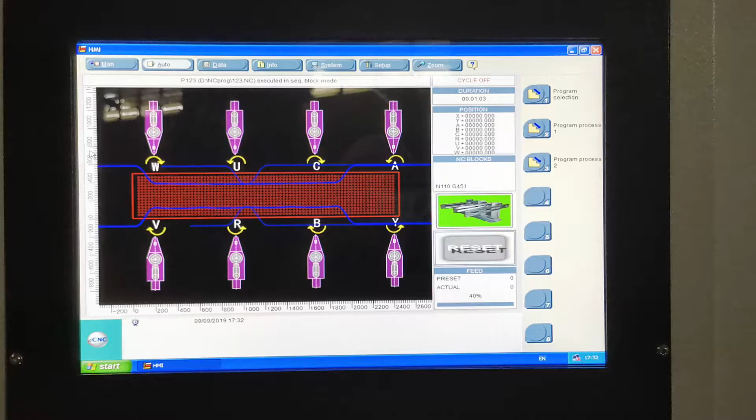Okay, now we will make an introduction for the controller.

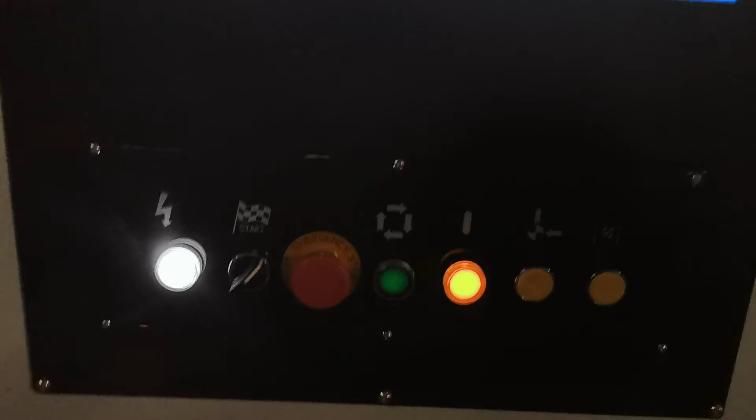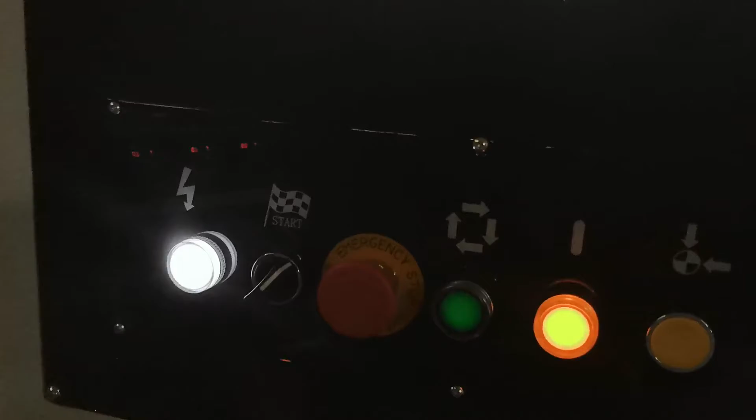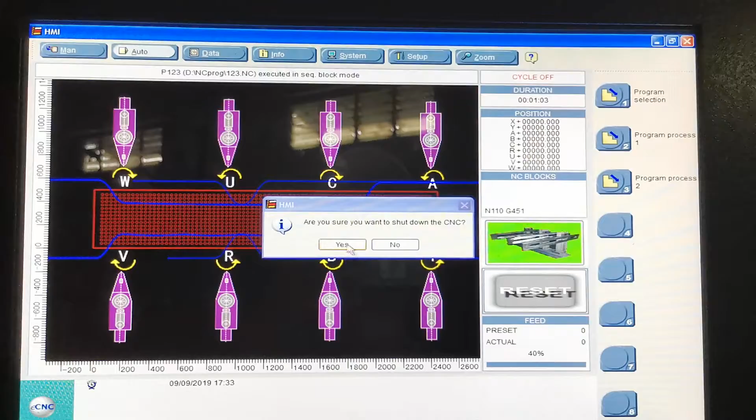Now we will show how to close the controller. Turning off the controller directly by the button is prohibited - the light isn't very good so we cannot see clearly, but this is not the correct way. For the correct turn off, we need to shut down the computer through the proper shutdown process. First, turn off the software by pressing this, then press this button and press shutdown to shut down the computer. After the monitor is black, we can turn off the power by this button.

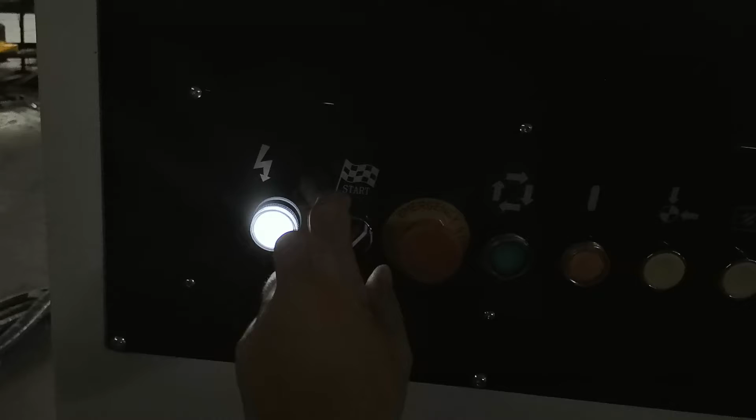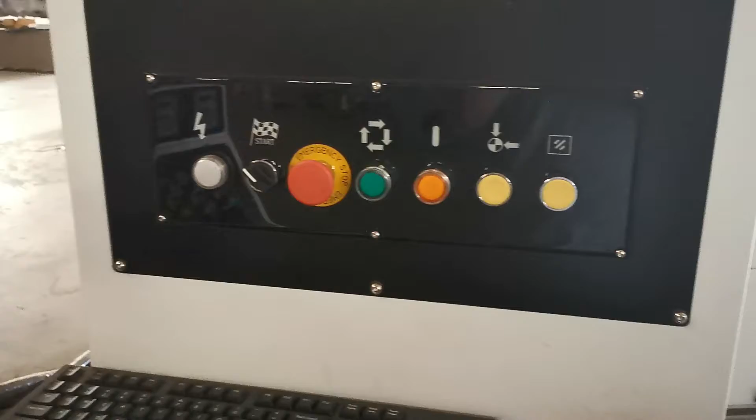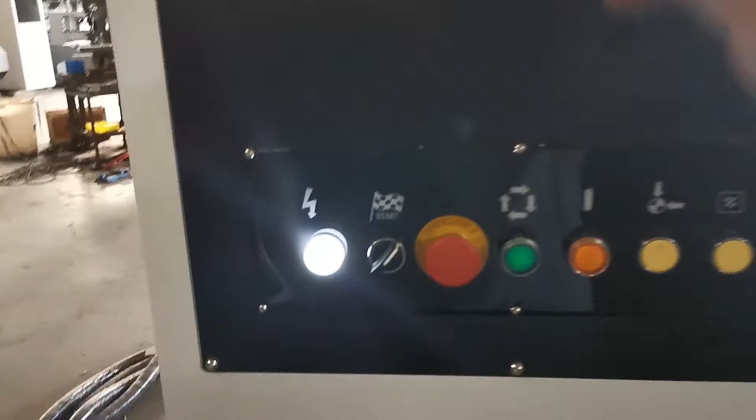Now we will start the controller. First, turn this button to turn on the power. Now the system will be starting.

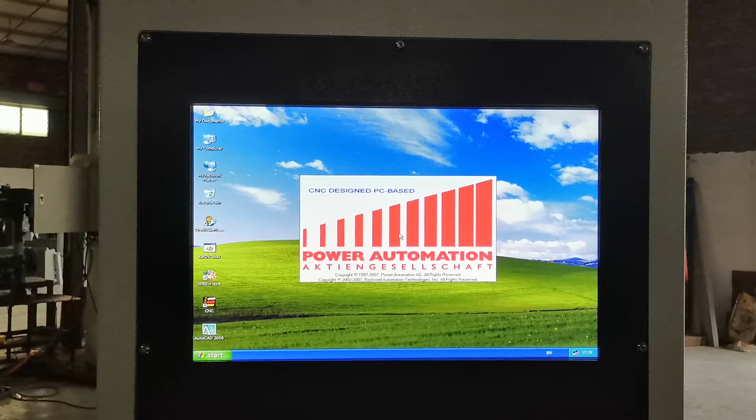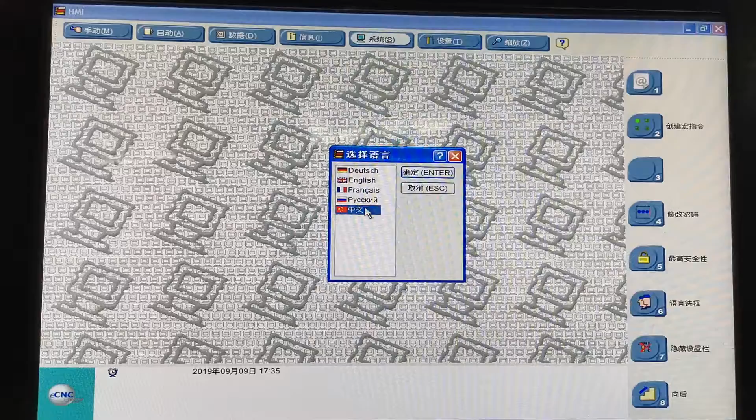Now the controller program is starting. We'll make an introduction. Here we can change into the English version. Now the interface is in English. This is the manual - you can press this button.

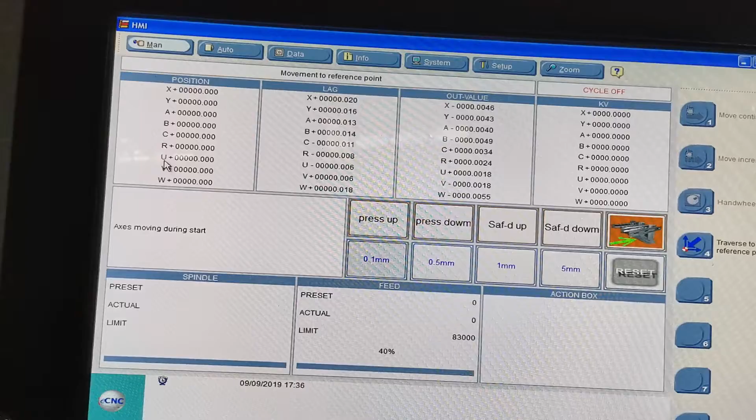Press up and press down control these press cylinders. This is the safety door, and this is the stop fans. We can demonstrate this.

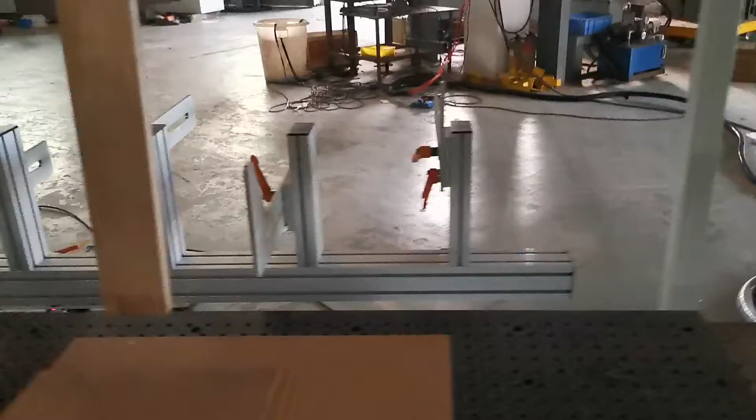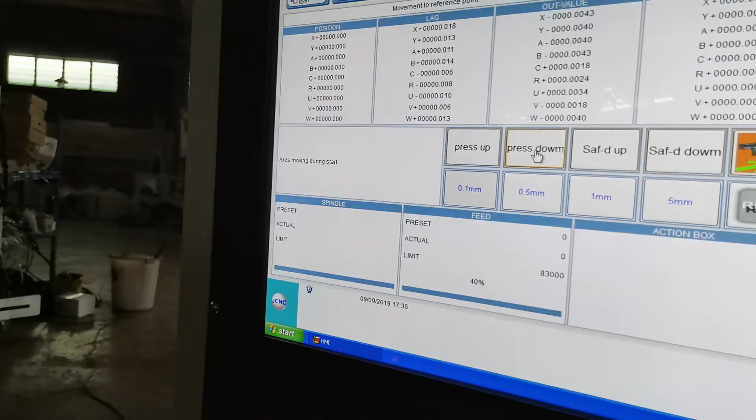Now the press cylinder is in the up position. We can let it press down - we press this button and now it will come down. Press up.

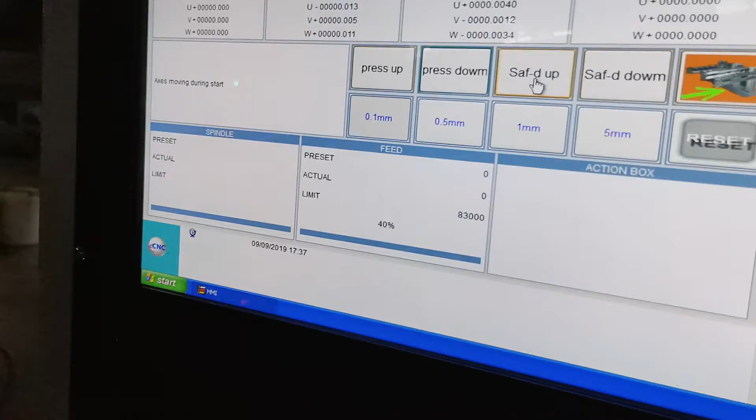Press down. Now we can press the safety door up. We can check here the safety door is up. We can press safety door down and it will come down. Safety door up, down.

We can check the stop fans by pressing the stop fans button.

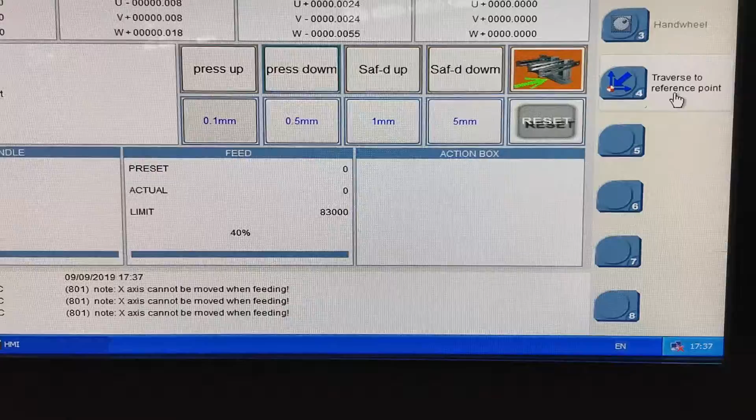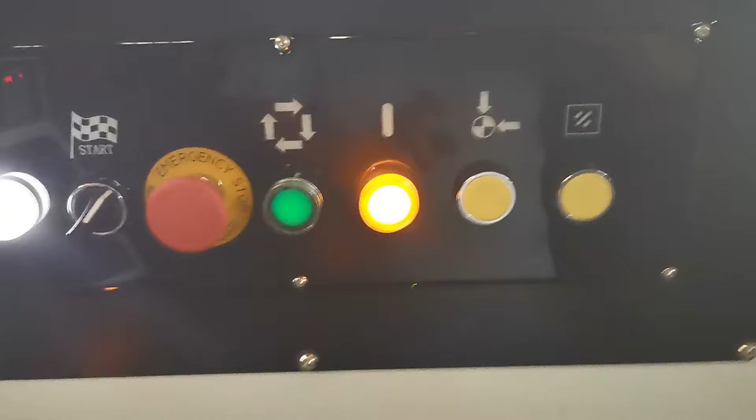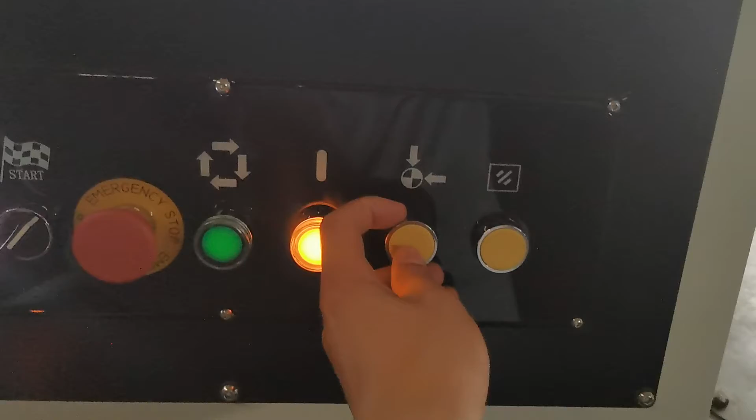This one is go back to the reference point. Normally we don't use this button for the machine to go back to the reference point - we use the other buttons. We can check the buttons. This is the go back to reference point button. Here we can check - it's already at 0. We can press this one to see what happens. We can see the head is going back to the reference point.

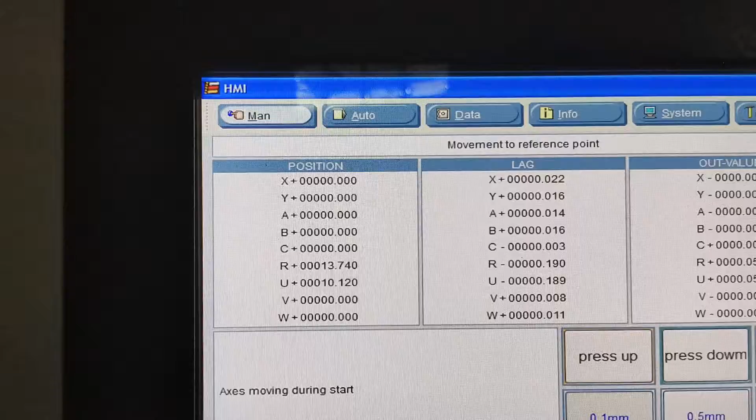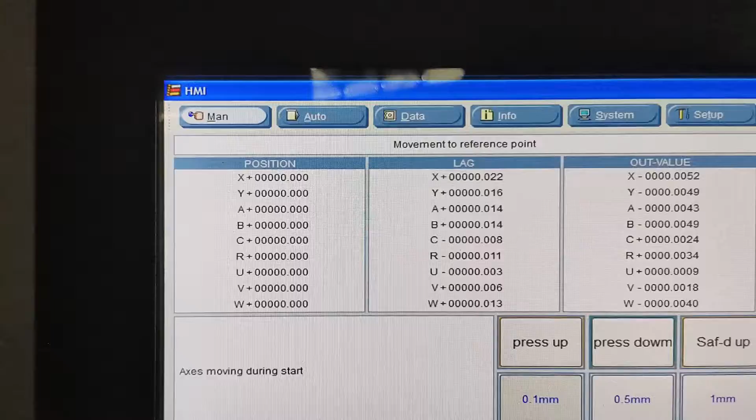Now the system has gone back to the reference point. Next we will show the auto version.

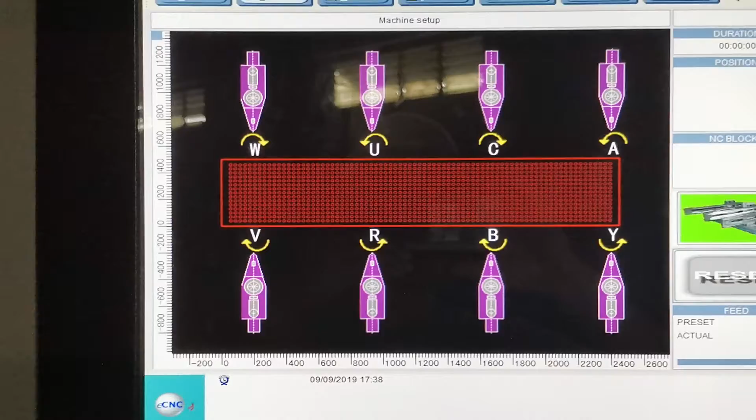Press this button. Here shows 8 heads, for the milling head and sanding belt. Here is a button - this one selects whether the stop fans work or not. If we make it green, it means the stop fans will work in auto version.

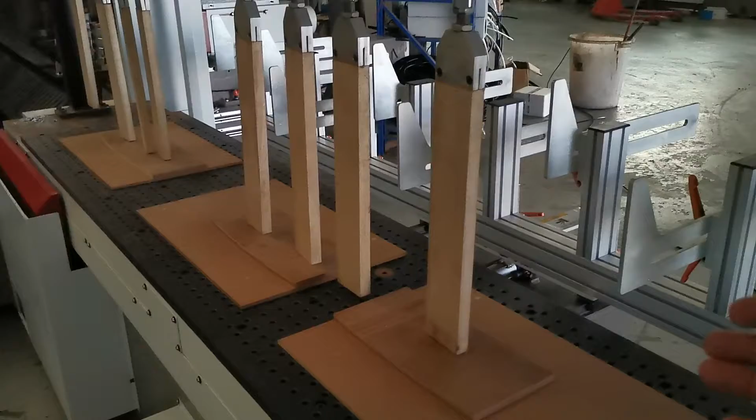After production for each cycle, the stop fences will move forward and stop, waiting for the new workpiece loading. After loading, we press the start button on the controller and it will do the next production cycle. The stop fences will move backward.

The stop fences will be moved forward and backward automatically.

This one is a program selection. For example, I want to produce a program - we will press this button and select our program.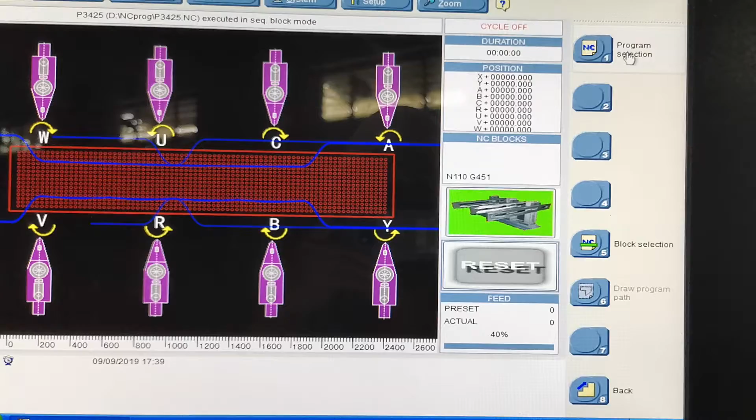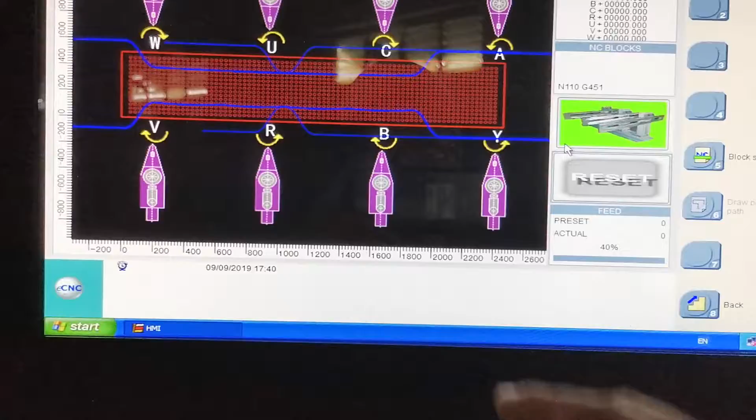Here it opens the file selection window. We press all files and it will show the NC programs here, in this files folder. We can, for example, select this one. Now the program has gone here and we can check the file name here. It's ready for production.

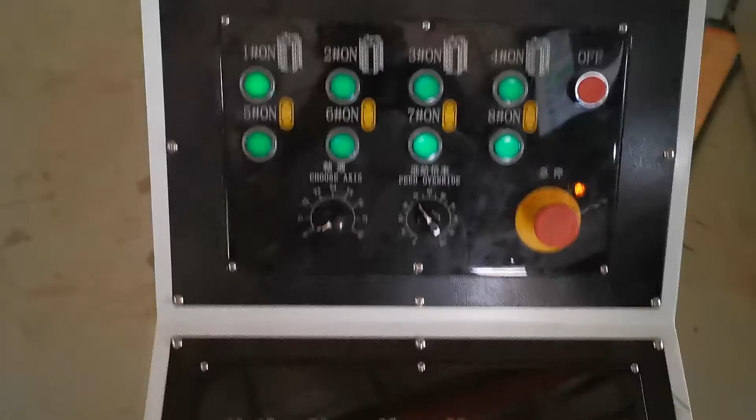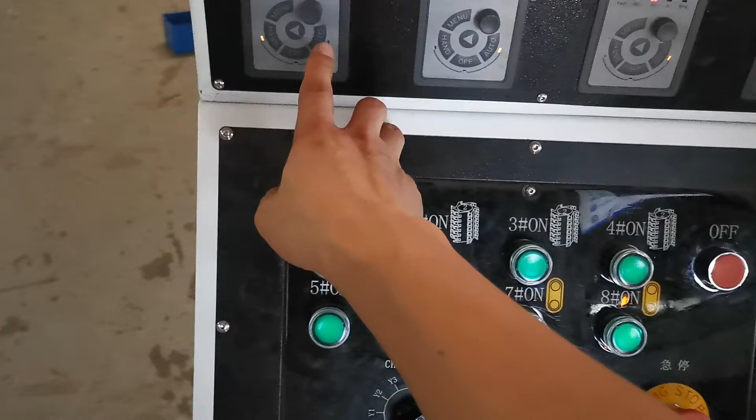Next, we can use the controller box to do the production. This button shining means it's in auto version. If we want to use the sanding belt, we need to make sure the auto run is lit. If it doesn't light - for example if the auto doesn't light - it means this sander belt doesn't work. Only when the auto light is on, after pressing auto and it lights, can this one work.

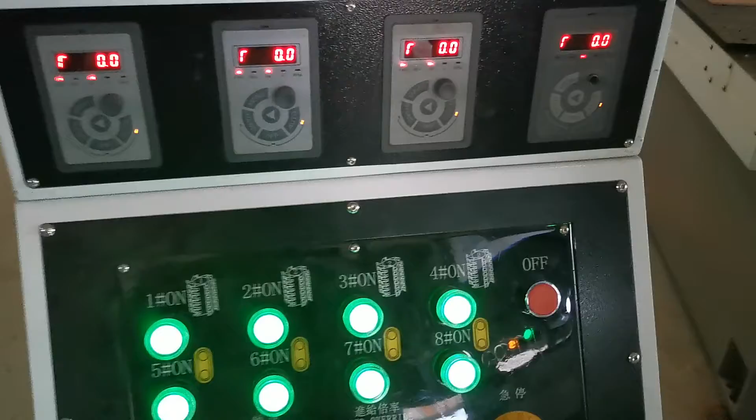For example, if I want to use all of the milling cutters and sanding belt, we will press all of them, making all of them light up. Then we can select the production speed, then press the button and it will work.

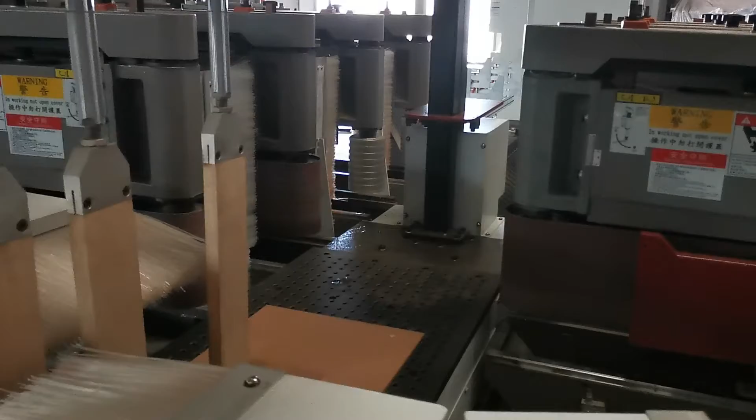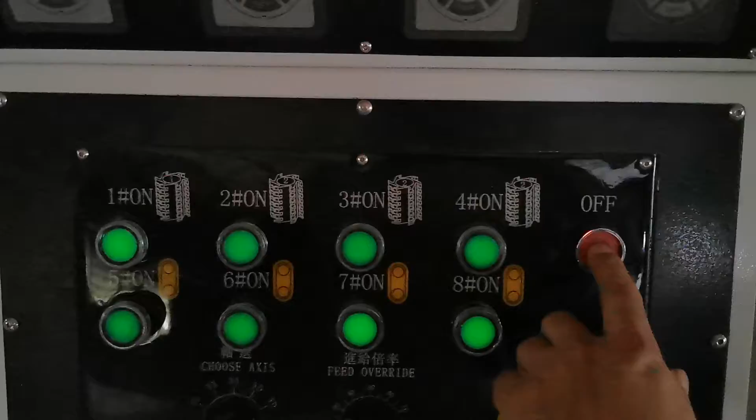We press this one to stop all of them. And another one...

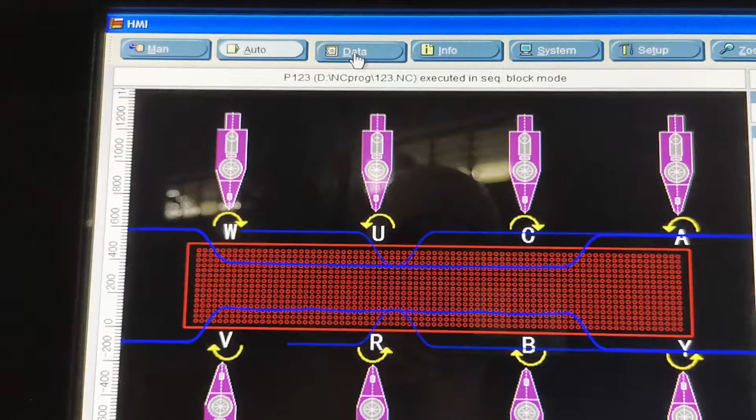This data shows the offset for the sanding belt and for the milling cutters. For the milling cutters, we don't need to input the offset - we don't need to change the data here, just keep it at 0.

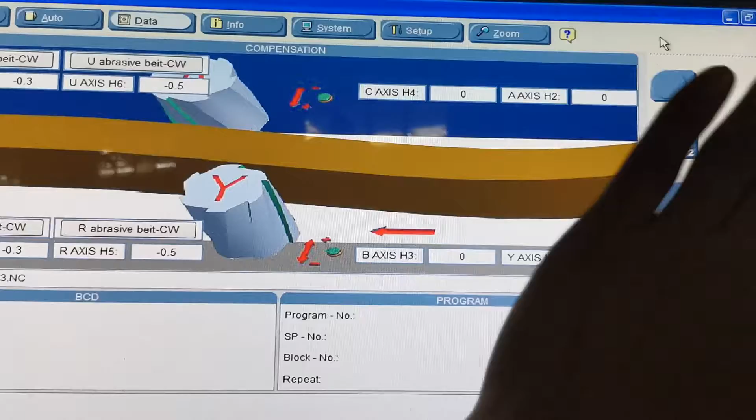For the sanding belt, we can change the offset data as per the request. We can check the sanding result for the workpiece - if you want to sand more, we increase the data; if you want to sand less, we decrease the data.

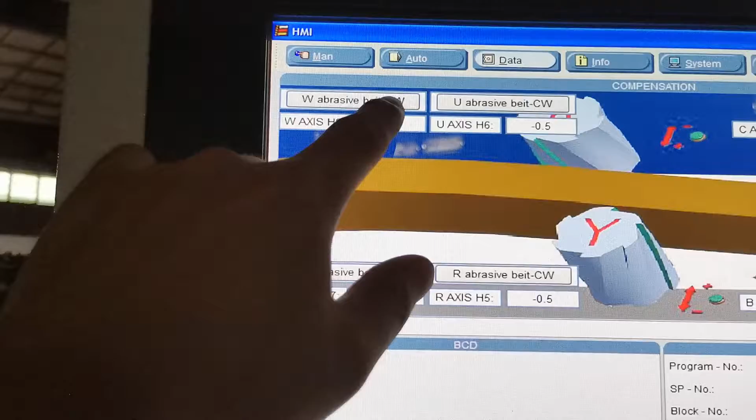Here is the information - we don't need to change this. System, we don't need to change. Setup, we don't care about.

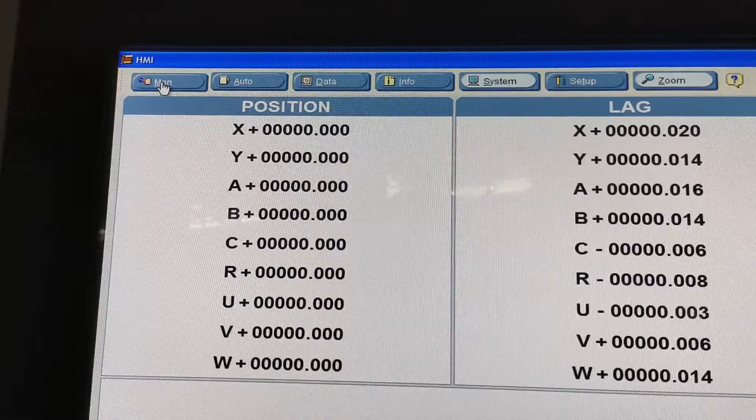We often use the manual function and auto function - we just use these two windows.

This is the controller introduction. For the controller shutting down, we do it again.